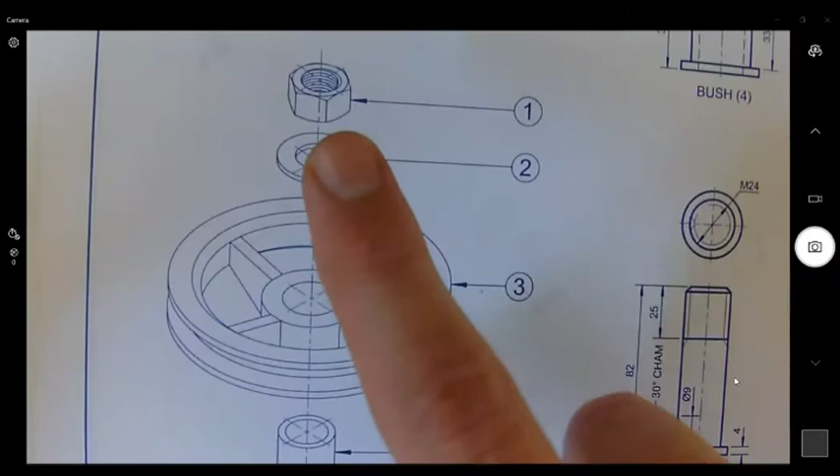Now, it's not really exploded, there's not a bomb on this page. What they mean is they gave you in 3D, that's what isometric means, how the machine, this pulley, fits into one another. As you can see, there's a shaft, then you fit this component over it, the bush over the shaft, the pulley, and then the washer and the nut that keeps it in place. And this makes up one entire machine or mechanical object.

Right, next, showing the relative positions. What they also give you is orthographic views of each of the parts. So they give it to you in 3D, but they also give it to you in 2D from different angles.

Now here's the question. This is the nut, but is this the front view or is this the side view? How do we know which view? So it's two views of the same component, but how do we know which one is which?

Go back to your exploded view. The question has to tell you which way is the front view. So according to this question, the front view faces that way. So that means...

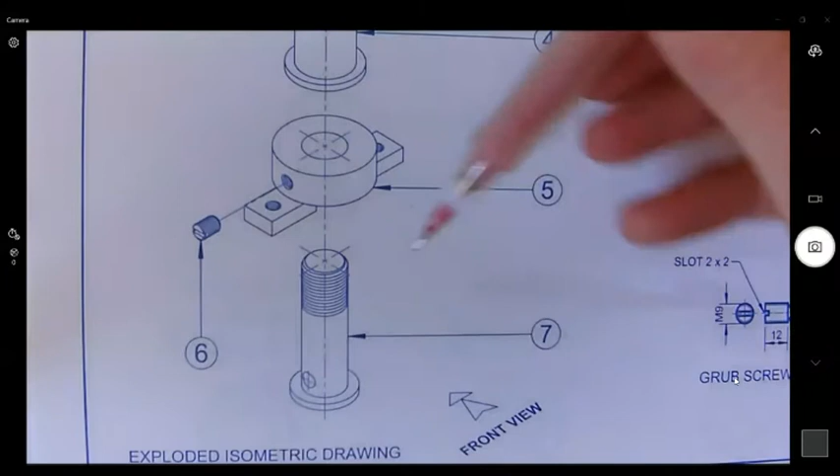I will get this, this is the front view. Then this side should be the left view. We can't see the right view because it's at the back, and you can't see the back view because it's also at the back. So the only two views they can actually ask us is front and left.

That's why, but usually they give you two views. So let's read what we have to do.

This is what they gave us. What do they want us to do? So answer the question on page 7. Draw to scale 2:1. Let's stop there.

Let's quickly just confirm again what 2:1 means. 2:1, I'm going to translate it, means 2 divided by 1, and 2 divided by 1 equals 2. So this means all the measurements must be multiplied by 2.

Okay, so draw to scale 2:1, in third angle orthographic projection. Mechanical will always be done in third angle, which just means if you draw a left view, it's on the left side of the front view. If you draw a top view, it has to be above the front view. Your front view is always your starting point, and we go from there.

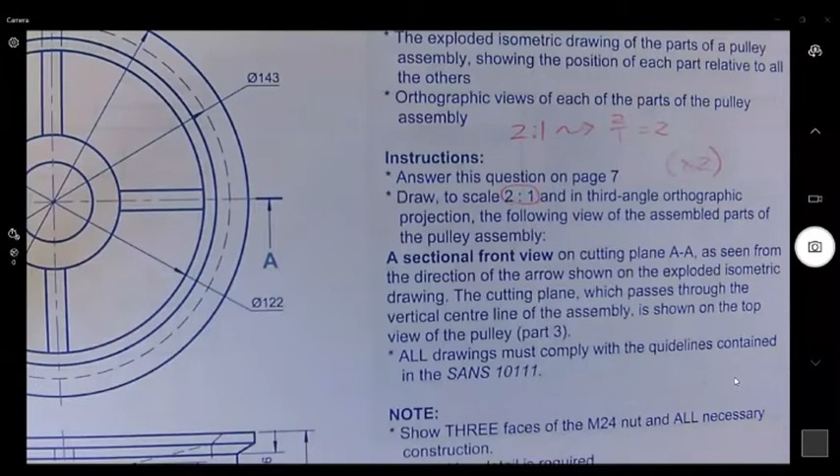Okay, so draw this pulley assembly, and the only view they want is one view, a sectional front view. Sectional means it's cut. Where is it cut? On cutting plane AA. Let's look for cutting plane AA.

It should be given to you somewhere on one of the components. Let's see. The top right, sir. Top right, yeah we go. Thank you. There. So according to this picture, this pulley is going to be cut in half, exactly halfway.

So it's almost like if this was a piece of cake, the front part will be removed. Okay, so they want a sectional front view, and that's the only view they want.

Sometimes usually they ask for two views. Today, just to start off, we're going to start off one view. Okay, as seen from the direction of the arrows, let's just go back.

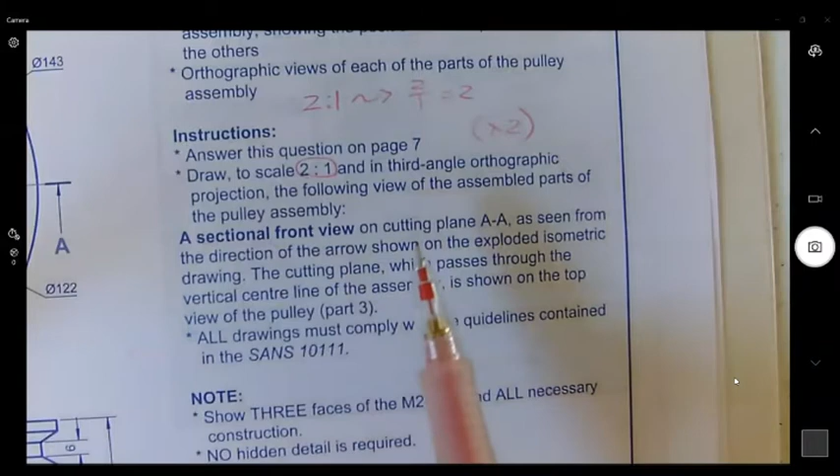Now, since the arrows are pointing upwards, it means this part in front is removed and the back part is left behind. If you look from a top view perspective, we're not going to draw it from a top view, but just so you get the idea, vertical lines. This is also important to note.

Show 3 faces of the M24 nut. We'll get back to this. And then luckily, no hidden detail.

All right. Now, a new thing that you also have to start doing for mechanical is you need to do some planning.

This planning will help you finish the picture quicker. The first thing is they want only one view, the front view. That means they gave us too much information, which they may do. We don't have to use all the information. We don't need to use the top views, but they are there because we need some of the measurements that might not be available to us on the front view.

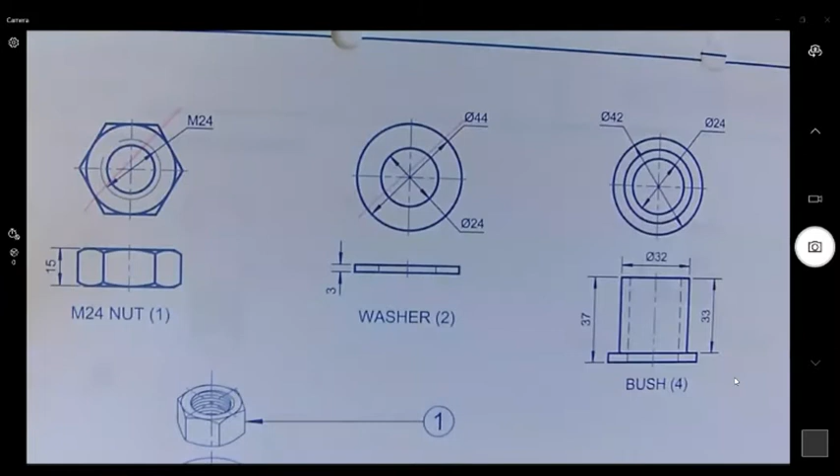What I usually do is take a color or pencil and lightly cross out the views that I don't have to draw, so that I don't get confused about which one I have to draw. This is part of my planning. It's not something you have to do, but I recommend it.

So for every single component, I'm crossing out the parts I don't have to draw. The grub screw, don't have to draw that part. Don't cross it out too much because we still need the measurements, but you don't need to draw it. This part we don't have to draw. We only need to draw the front view of the bracket. And I think that's it. That's the first thing that I do for planning.

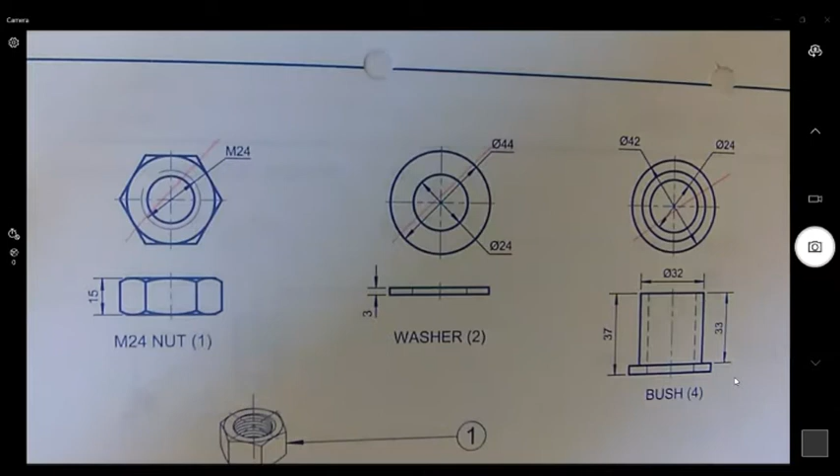The second thing for planning is to plan out how you're going to cut this picture. What we mean by cutting is that since we're going to section this view, we are going to see some of the components on the inside of the drawing. How we demonstrate that something has been sliced open in EGD is what we call hatching, which is lines drawn at an angle.

Let me just quickly get the memo so you can see what I mean. I'm going to get the memo of this drawing just to show you how the end result will look.

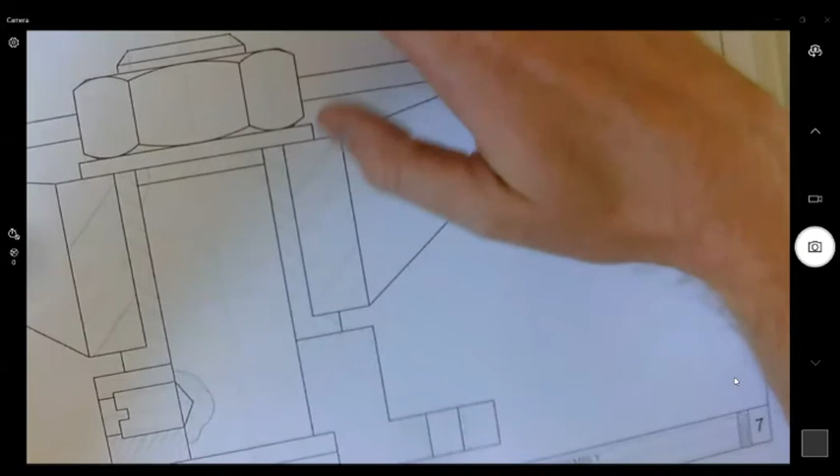This thing is cut in half, and those lines, all these skew diagonal lines, represent hatching, how the blade passed through this object. But you'll see some of these components are not hatched, and there's a reason for it. There's a rule: we do not usually hatch a shaft, the bolt, the nut, and any support structure, but we'll get back to this. So there's the final image.

So you know what we're drawing, what we're working towards. Do you see how big it is? If I zoom out, look how big it is on your A3 page, just because the scale is 2:1.

Now back to the drawing board. So the next step I always do is I first determine for myself which view belongs where. And then the next thing is, what do I need to cut and what don't I have to cut? So what doesn't need to be cut at all or hatched?

So for the nut, there's a rule: we don't cut the nut, so I'm going to encircle it. It's going to stay. So if you redraw it, even if there's a blade, if you pretend a blade passes through it, you leave it. Same thing for your washer. You don't cut it. This is very important, you'll see on the picture.

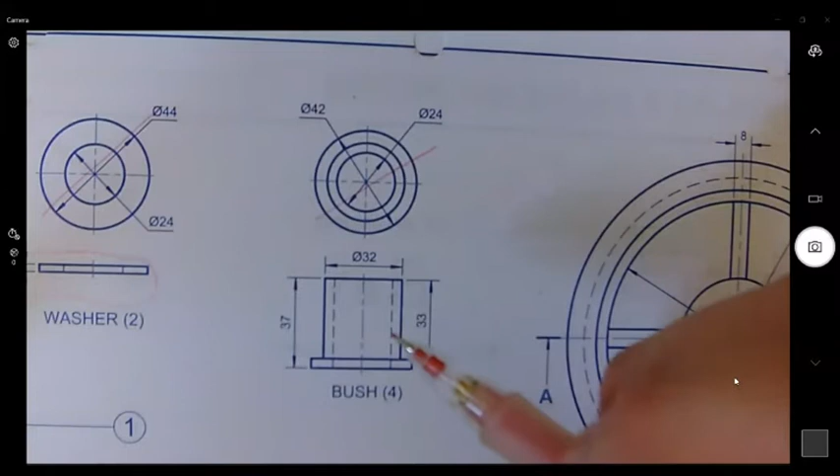But a bush needs to be cut. The general rule that I always remember in my head is, why are we cutting in the first place? Because we want to show someone what's going on inside the machine, that's the idea. But think about it, what's inside, let's say, the shaft? Just more metal, there's nothing more to show. So that's usually the rule I remember, with a few exceptions like bolts, washers, and support structures. That's always what I remember.

I think they're testing the security alarm.

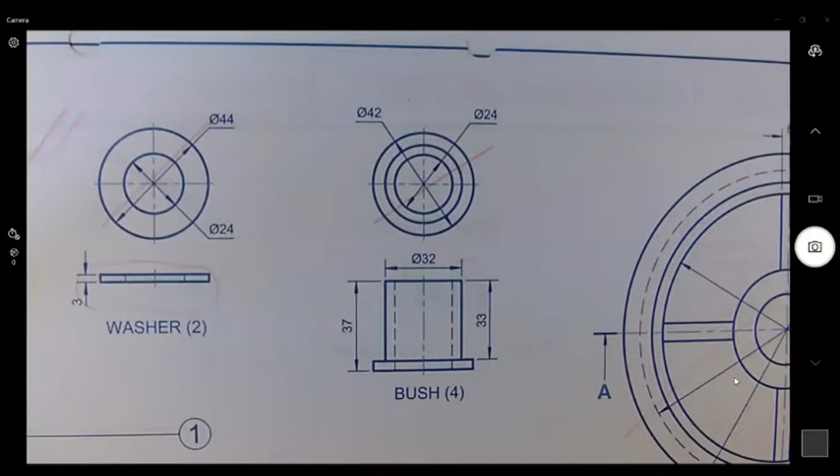So for the bush, your hidden detail acts as the guide of how to cut it. What I do is take a different color or pencil, and I just quickly draw in the hatching for myself. So this hidden detail becomes part of the drawing, and that part will be hatched. The other side will be hatched too.

And then these lines on the inside will fall away. We're only going to draw the outlines and the hatching itself. So that's another rule I remember.

If there's, for instance, that little line there, that part of the line won't be there anymore if you draw it, because we only draw the outlines. Inside this bush, the shaft will fit inside the bush, and the bush will fit inside the pulley, so it's almost like a puzzle piece that you fit together.

Okay, so there's my first component, and I've planned out my hatching, just quickly freehand, so I know what to do. So I'll recommend, this is a nice step to follow.

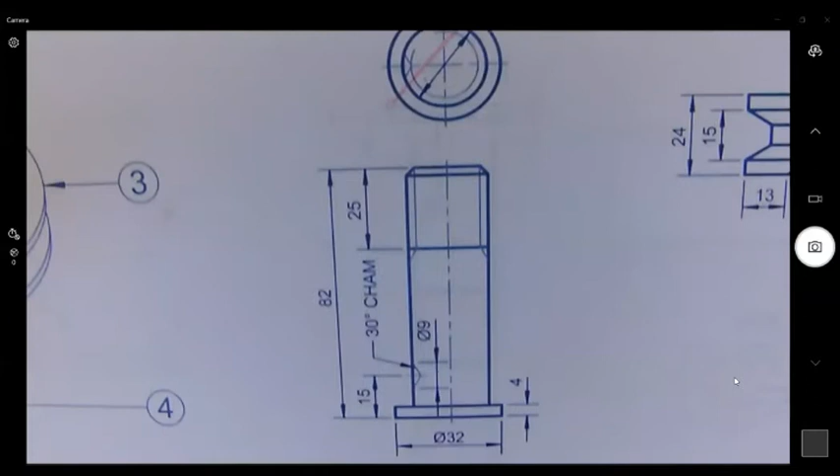Okay, next one, the shaft itself. Since there's nothing inside the shaft to reveal, it's just a metal piece, we're not going to hatch it, except for this little part here. Why? Because there's a small grub screw that holds the shaft in place so it doesn't rotate. They do this sometimes, otherwise this component, your bracket, is going to swivel around as well. So this is to keep these two components from turning.

So basically, the grub screw will fit in here, if I draw it quickly. So there it is. And then what you do is they call this partial sectioning. You take a freehand, and in that part there alone will be hatched. The rest is the same, just that little part will be added.

Okay, done. Are we going to hatch the grub screw? No, because what's inside a screw? Just more of the screw. There's nothing else to show, so we're not going to cut it.

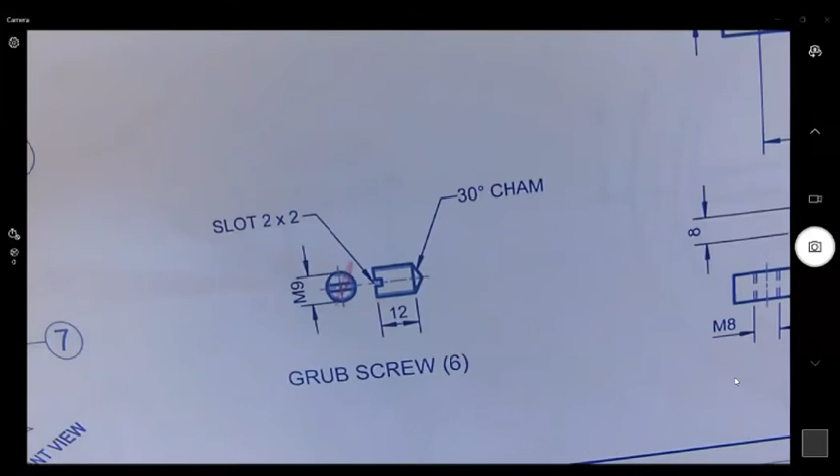Let's go to the bracket. The bracket actually makes it easy to see how we're going to cut it. There's a hole. Why do you see double lines? Because the outside two hidden detail lines represent the hole itself, and the lines on the inside represent the threading.

So there will be some kind of bolt that will screw into this component to hold it in place. But we only care about the outside. Oh no, we care about both. I'll show you what we're going to do.

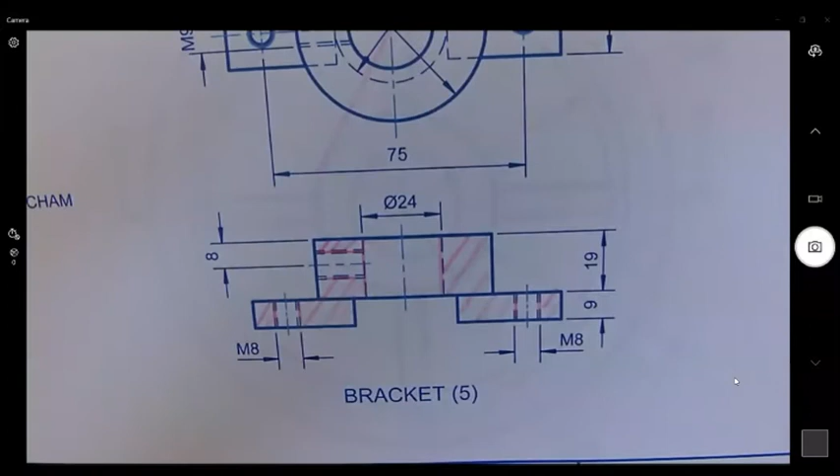Okay, there's a hole. This is where the grub screw will fit in. And then there's a big hole here where the shaft has to fit in. And when we add the hatching, there we go. Okay, one more component to plan, and this one is a bit difficult just because there are so many lines.

The pulley. Okay, bear with me. Remember, because we're going to cut this thing in half, a lot of these lines on the inside won't be there anymore. Okay, so I'm going to follow the hidden detail again as a guide.

Now I'm going to start hatching it. Remember, this is just our planning, we haven't even started. By the way, the rule for myself: as soon as hatching goes over lines in the middle, those lines won't be there anymore. Let me just show you on the memo again what I mean.

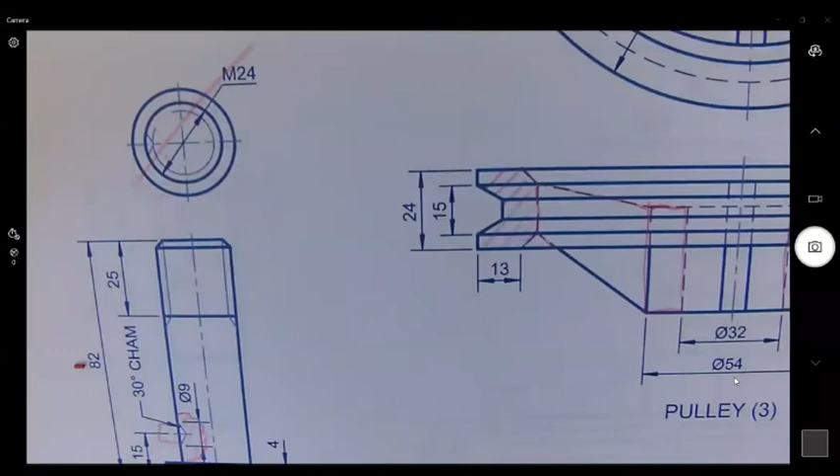Okay, do you see? There, that's that same part. You see, you only see the outline, not all those lines on the inside. Okay, so compare, look at all those lines. Now you only see the outline of the pulley, so it looks a bit simpler without all those lines.

Okay, right, we do not hatch this part. Yes, this part is cut as well, but if you look from a top view, it's a support structure. Let me go to the 3D picture. That wedge, the purpose of the wedge is to hold the outside pulley and the inside part of the pulley together. And if you cut the wedge in half, what will you see? Nothing, it's just more of the wedge.

But the rest of the pulley has to be cut in half so we, for instance, can see the shaft in the middle, because that's the idea. We'll see this as well. We're going to see this as well. We won't cut it because it's at the back of the pulley.

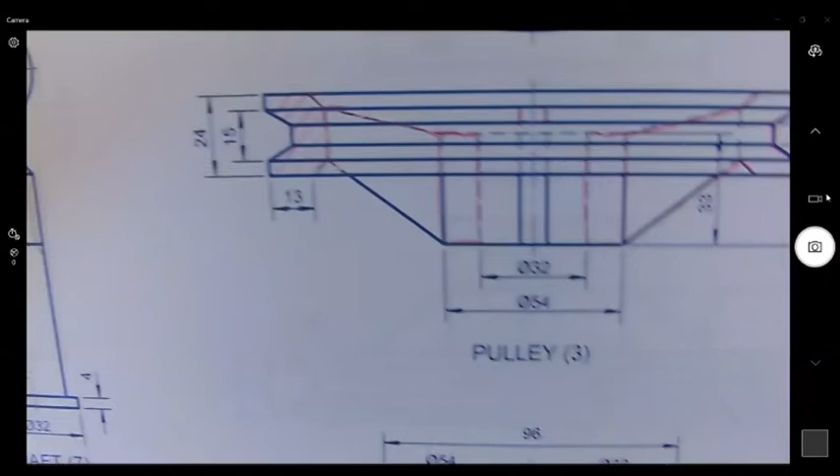Go back to the 3D picture. So if I cut it there in half, this is that part there. And then that groove there, that edge, is what we see there at the back. Okay, so this part will be hatched and all those lines fall away. This part will be hatched. This is cut but not hatched.

Here we go, this might feel overwhelming. That is why we're starting with this in the beginning of the year. You have enough time to practice this, so don't worry. This won't be something that you're going to write a test about tomorrow, or for the first month. So just start. Like I said, if you mess up this drawing, it's fine, it's about learning. And if you still struggle, then we'll organize some extra classes a bit later in the coming weeks. Okay, so there's my planning.

Now I'm actually ready to start.

This took a while because I had to explain, but this should take you not more than 5 minutes in a test. This is just to plan out your picture. But I guarantee if you plan your picture out before you start, especially how you're going to cut it, it will save you a lot of time and headaches later.

Okay, now let's go to our blank picture. You can choose which component you would like to start with. What I've learned over the years is it's easiest for me to start with the shaft itself because everything else fits onto it, so it's almost like the center of the entire shape. So I usually start with this guy, component 7. But you could have started with the pulley instead, that doesn't matter.

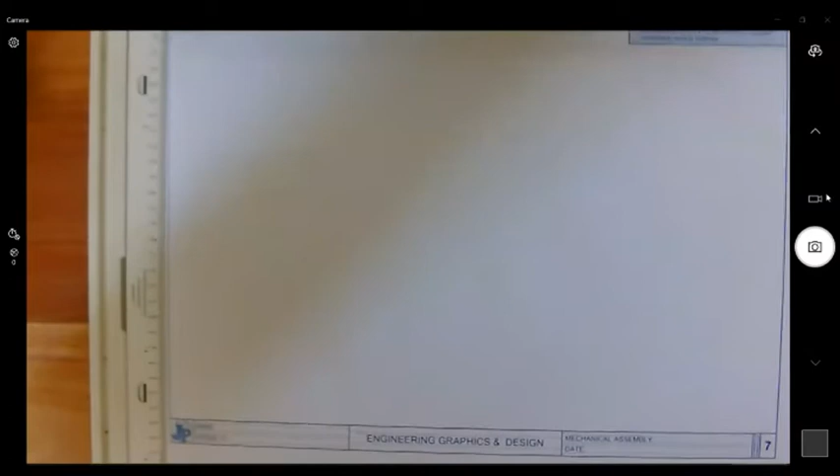Okay, here's our next problem. In front of you on page 7, we've got a blank page. Where do we start? So we start with the 60 and 30 degree lines. Yes, but the question is, where do we start? On the paper. Yep, but where on the paper?

So you have to draw those things so you know where to start. No, you're thinking about isometric. We're going to draw this flat. You'll see now what I mean. This is flat, two-dimensional.

Since we're only drawing the front view, we only have to draw one component. We're going to draw it in the middle, so there's enough space on this side and this side. A good way to check that your picture will fit is, since the shaft represents the highest point, you take that measurement, 82. Oh wait, I forgot something.

Guys, before we continue, the scale is 2:1. So quickly take your calculator and work out all the measurements. What I do is cross it out, and you double everything. Otherwise, after a while you'll forget about the scale, and then you'll get this weird big shape, small shape situation. So quickly, before we start, take your calculator and multiply all the measurements by 2.

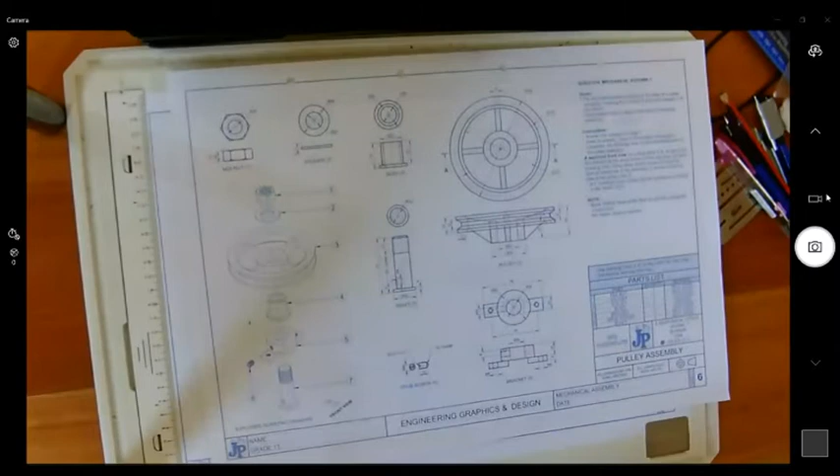Okay, so let's quickly do this. I'm going to do it as well, and then we will continue, so you can see what I'm doing. Let's quickly just double all the measurements.

So you see, I think there's a question here.

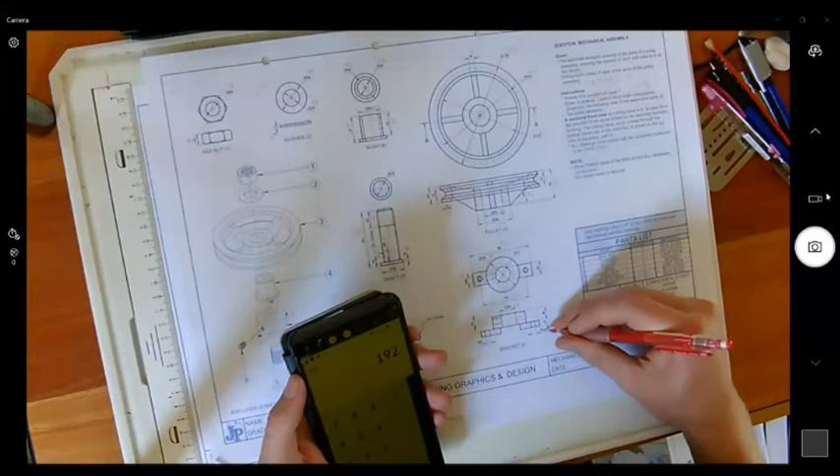Let me check if I missed anything. Now, this might feel like a lot of work, but there's nothing as horrible as drawing a picture with a scale, and then somewhere halfway along your drawing you forgot about the scale, and now you have this weird big, small part and nothing fits together anymore. It's horrible. So play it safe, add the measurements beforehand if there's a scale other than 1-to-1, to save yourself a lot of headaches later.

Just want to get this a bit closer.

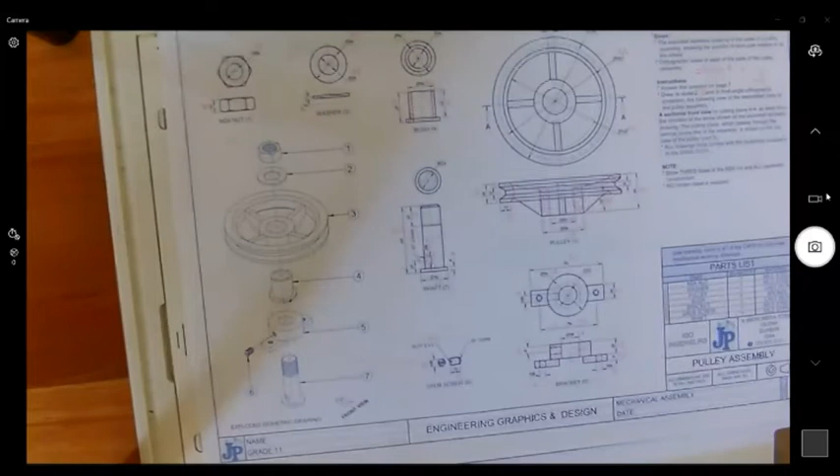Okay, I'm going to put my question paper just here at the top so I can still read it. Now we're going to start. Like I said, the middle is the best place to draw this picture. Let's say in the future we have two components to draw, a front view and a right view, then the front view would be here and the right view here. But since we only draw one component, planning for space is not that crucial. When we get to two pictures, we'll discuss that. So I'm going to start here in the middle somewhere, not exactly, just plus minus. But what I'm going to do is start closer to the bottom, drawing upwards, since the shaft, if you look at page 6, is the lowest point in that assembly line.

Okay, so I'm going to start.

You do this as the Afrikaans saying goes, I think it's an English saying too: to eat an elephant, you eat it piece by piece. You're not going to swallow the entire elephant at once. The same thing with mechanical assembly, one part at a time.

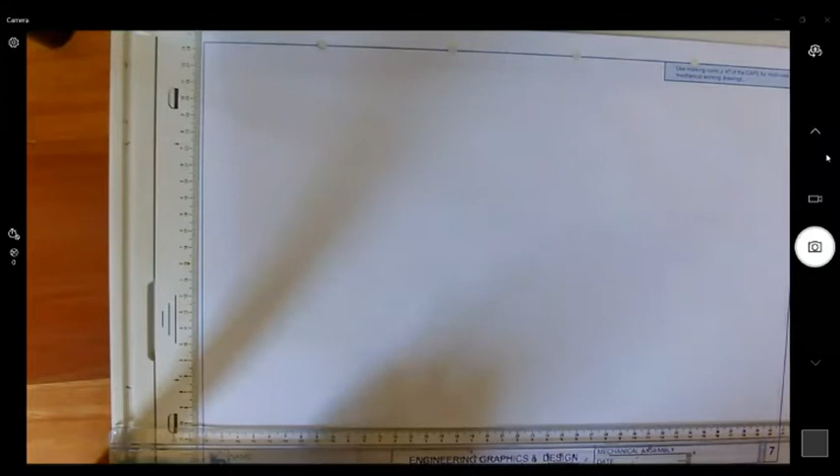So I'm going to start with drawing the shaft. I'm going to focus on this part. Use the measurements and draw that entire component. What you can do, however, is not make that part too dark yet, because we have to add the grub screw afterwards. The rest you can darken already and complete, drawing it exactly the same way. Just that part there I want to show you.

I'm going to zoom in closer because I'm only going to draw on a small part, and I'll move it around as I'm focusing on different parts of the drawing.

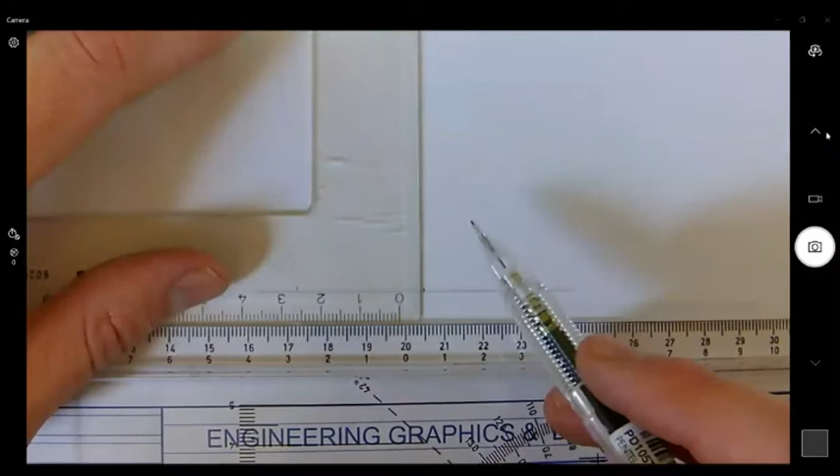Pro tip for you guys: since the shaft needs to have a center line, if you look at the picture, I'm going to draw the center line immediately, because I always forget to add the center line. I always forgot, and I always lost marks for center lines. The center line.

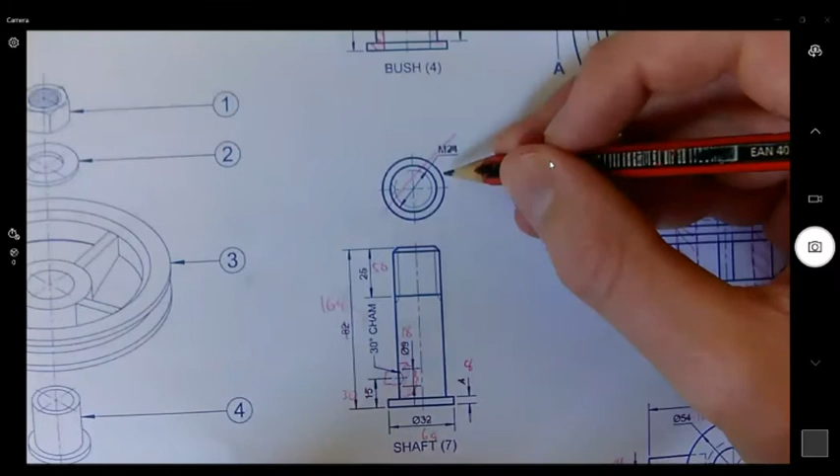I'm looking now for how big the shaft is, and where you'll get this answer is from its top view. So it's 24 - oh no, sorry, I'm lying, it's not 24. Where is the size of the shaft? Then it should be probably on the pulley. Oh, here it is - since the shaft has to fit inside the pulley - no, that's the bush. Let me say it again: since the shaft has to fit inside the bush, that is the size of what the shaft should be. So is it 40? Just want to check, is it 48? Yes, okay, so the diameter of the shaft is 48.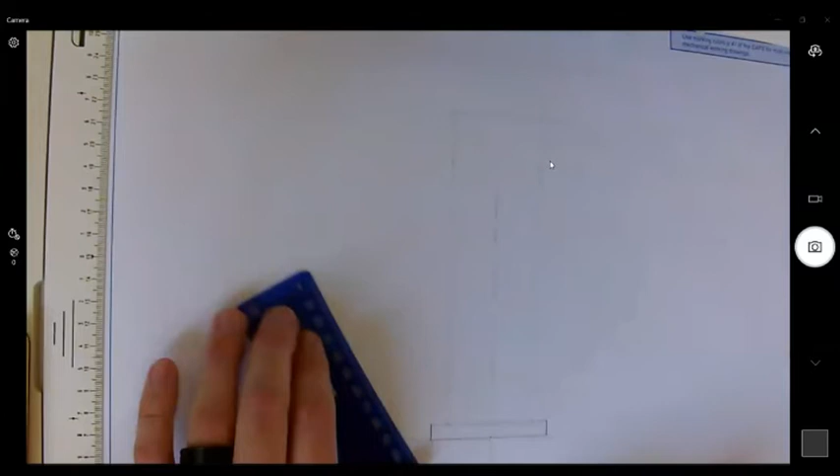Okay, it's almost time to take a break before the second period starts. Let's just quickly discuss the grub screw that has to fit into your shaft. I'm going to leave this at the top like this for now, and add all the detail at the end. So the grub screw has to fit in here. According to the measurements, it goes 30 millimeters up, and this is the center of your grub screw. So move this up a bit. Okay.

It's said here that the angle of the screw is 30 degrees, so that means if it's 30 degrees, but now it's at a 90 degree angle, you can use your 60 degree angle. But first, just draw the grub screw itself. So it's 18.

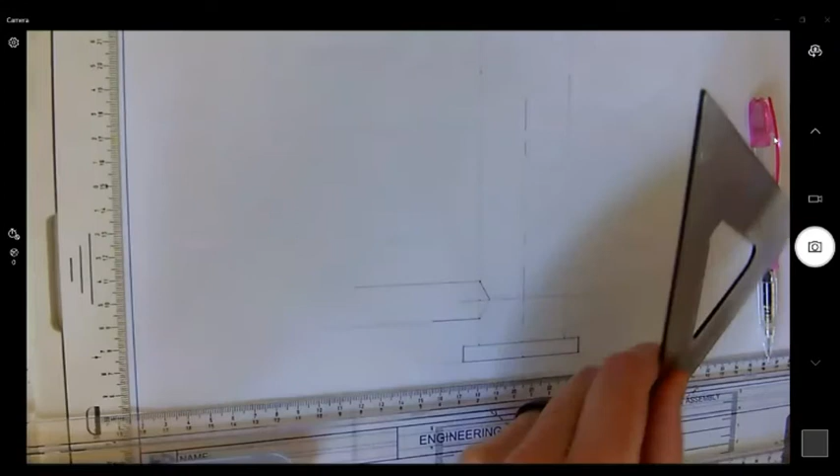Okay, so here's the grub screw. And now what you do to add the hatching is draw a freehand squiggle, just like this. This is fine. And then you take your ruler - I'm just going to turn it this way so I can fit in my ruler actually - and now you just add your hatching.

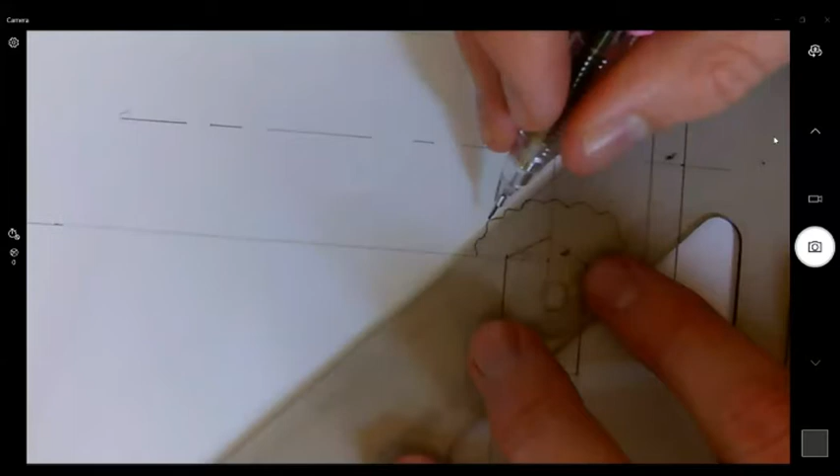Okay, so that's how far we are with the drawing, or that's where I am. If you're following along - oh, I forgot about the little part here at the top of the grub screw. We'll do it when we come back. Okay.

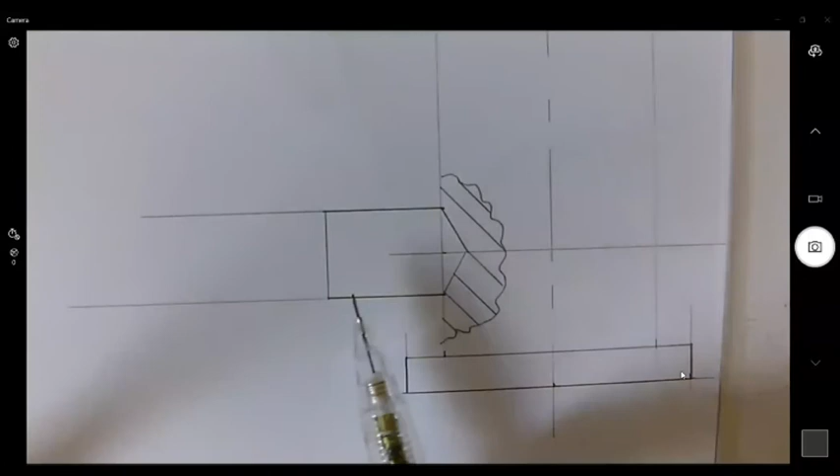Quickly record it, there we go. Okay, so how did I get the gap from there to there?

The complete distance, or the total distance, is 64. If you half it, it's 32 - that's the one part. And then this shaft here has a diameter of 48, because 24 times 2 is 48. So it's 32, half of 48 which is 24, and the difference between 32 and 24 will give you that distance there. All right, is that fine?

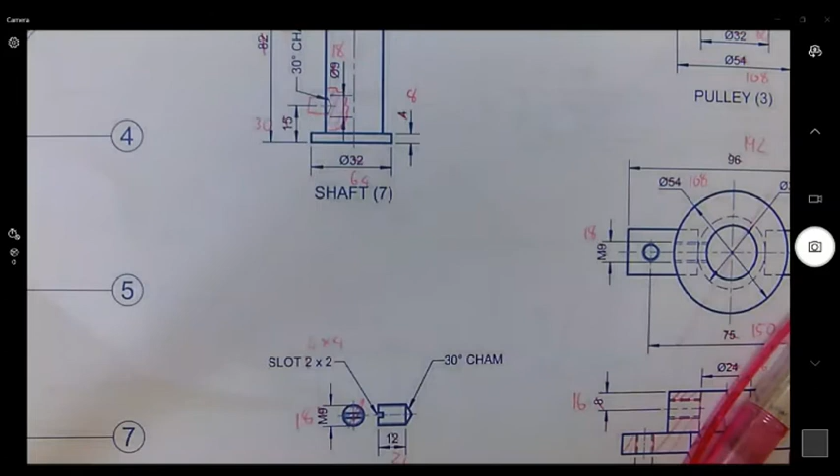Sir, how do you know how long... the thingy that we drew, the last thing we drew. How long do you know that's supposed to be? The grub screw, from there to there. Yes, sir.

There's the distance. So from... oh, okay, there you go. Thank you, sir. Don't worry, someone else might have missed that as well. Someone else who has a question?

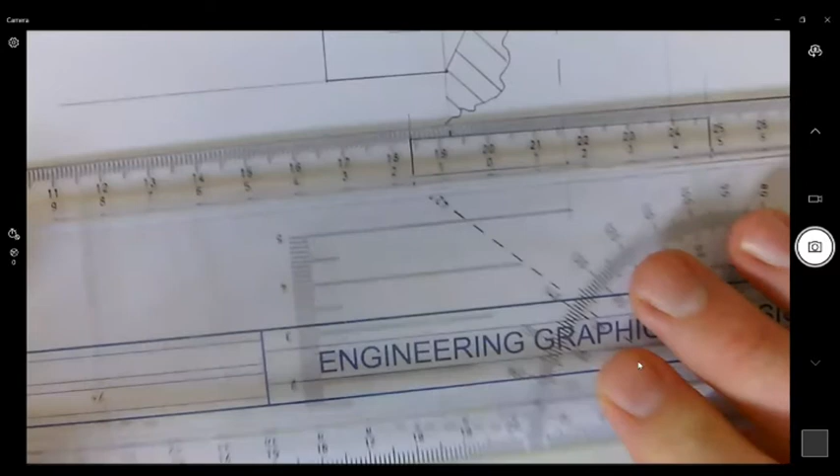Okay, let's continue. Before I leave the grub screw, because it's almost done, what I forgot to add is there's a little gap at the top where you can use a screwdriver to tighten the grub screw. And the grub screw is also a circular object if you look at it from a top view, so we have to add center lines again.

Okay, and then that little gap, it's 4x4. No, not the vehicle, as in 4 millimeters by 4 millimeters.

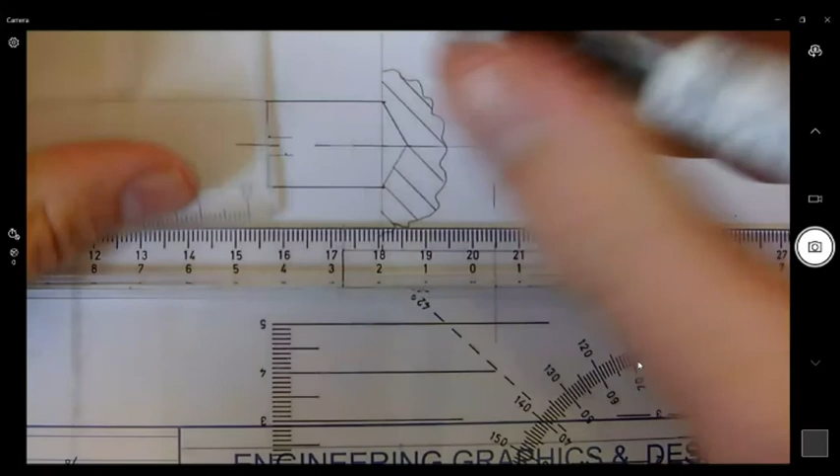Okay, there we go. But now I've got a problem. That line is there, but if I take my eraser it's going to rub out like half the page, or half the grub screw.

So what I recommend you should get for yourself is an eraser shield. Now what you do is line it up with one of the openings, that should work. That should be fine. No, maybe this one. Yeah, that should be fine. And I protect most of the drawing so I don't lose too much time trying to erase stuff and redrawing it.

If you're wondering why it looks a bit smudged, that's because I've got a dirty eraser. So make sure your eraser doesn't look like this, that's horrible. A clean eraser helps for a clean drawing.

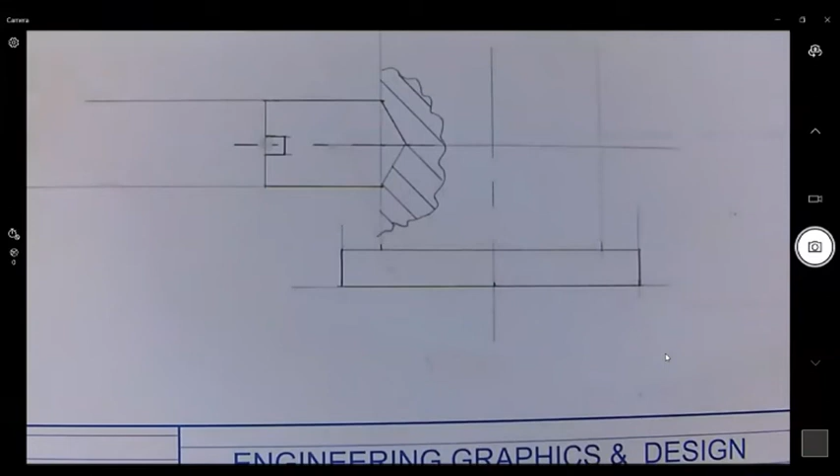Okay, that was the shaft. I'm going to leave this here because I also have to add the bolt, the nut, and the washer. So I'm not going to do too much for now, I'm just going to continue with the drawing.

Okay, the next part that has to be added is this bracket. So we've got this. I'm going to add the bracket now, it's this guy here. There. Okay, so now let's add the bracket.

Okay, what's the height of the bracket? Just want to quickly check something. 32. Do you see something?

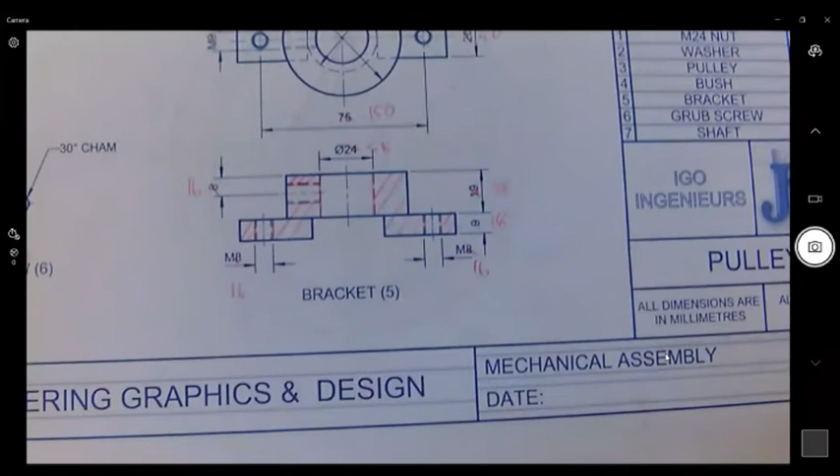If you look at the measurements, the gap between this and this is 32, and the spacing here is also 32. Well, that's before we worked out the scale, so it's 64. That means the shaft will fit in there nice and snug, so this bracket will stick over the shaft itself. So you'll see now what I mean.

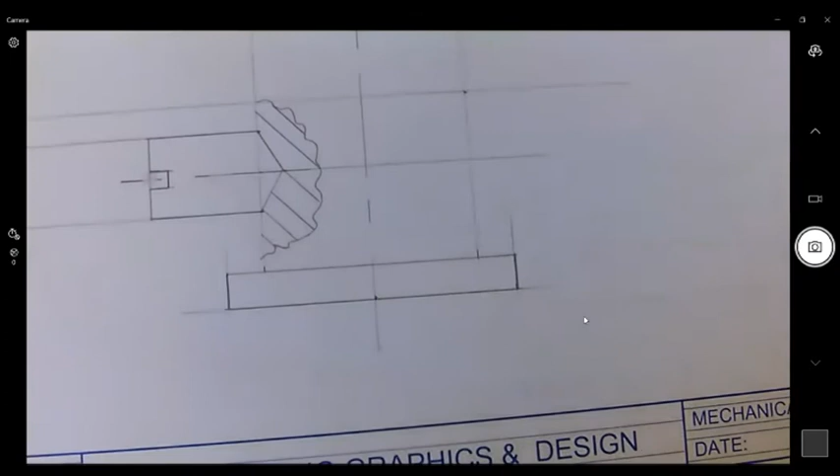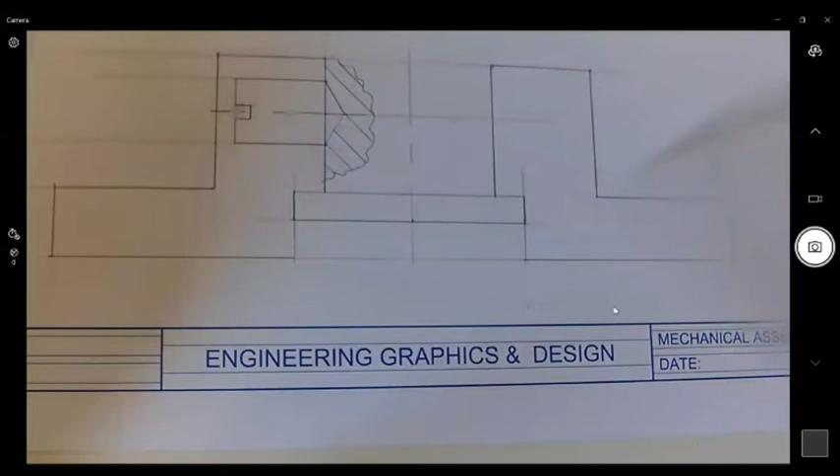Okay, there's the bracket. Now I'm just going to add the hatching. Now the rule about hatching is the angle and spacing don't matter, but it should look different. Every new component that's hatched should look different. And usually my rule is: the smaller the component, the closer the hatching together; the bigger, the wider the gap between the hatching.

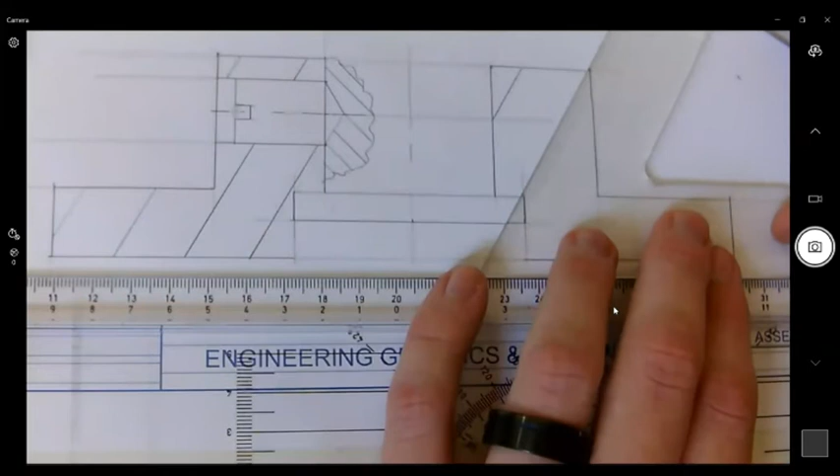Okay, there we go. So we've got the grub screw, we've got the bracket in place. I just think I need to darken this tiny bit more.

Okay, so I just want to check if I missed anything about... oh, I did. Guys, what did I miss? I forgot about the holes. Oops, okay, that's not too bad, it's likely just a bit of hatching I'll have to erase. I completely forgot about it.

Now there's something about the threading I want to show you when we get to these holes in the bracket, but we'll get there now. 16, so it's 8.

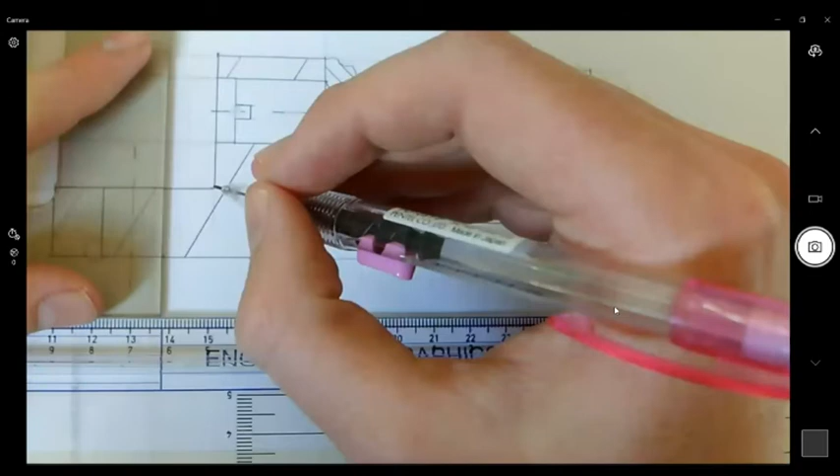Now I just need to erase that. Let's see if this side is a bit cleaner.

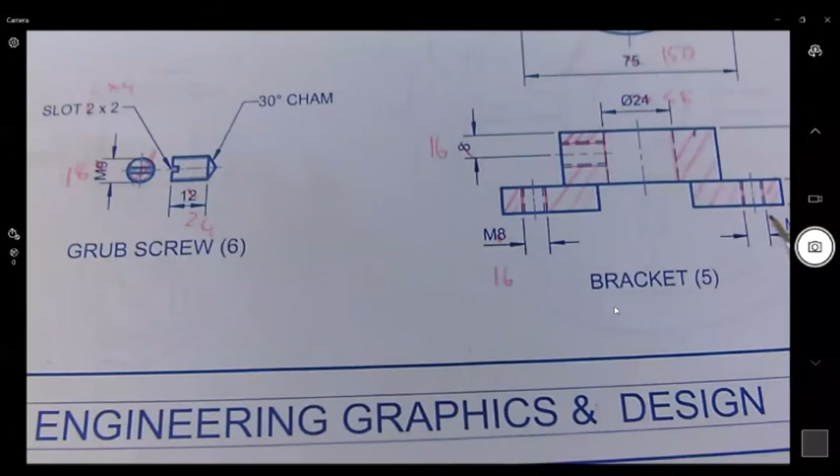Okay, now something about the threading we have to talk about. As you can see, there are 2 lines of hidden detail at the holes, because what they did is put in threading, which is almost like a groove for bolts to turn into, like our grub screw. Now, because the grub screw is already in there, we don't have to show it. But since these 2 holes are empty according to the drawing, we have to show that threading. So what I mean with this is...

At this hole here, we're going to add threading on the inside. And I just want to check what is the... yeah. Now, I'm going to teach you a bit of calculations.

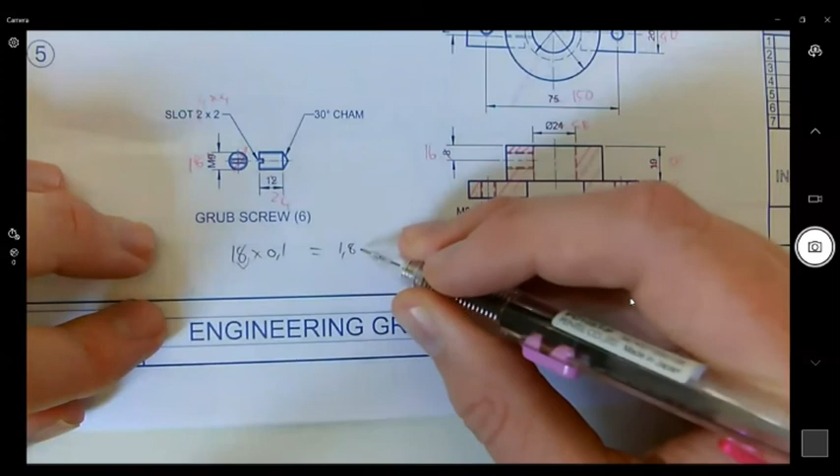So you get 1.8. Now, we can't work with 1.8 because to try and get 1.8 on your ruler is quite difficult, because there's 1, there's 2, so 1.8 is somewhere there. How on earth do you get it? You can't. So we round it up or down to the nearest whole value. So 1.8 is closer to 2. So we're going to work with 2.

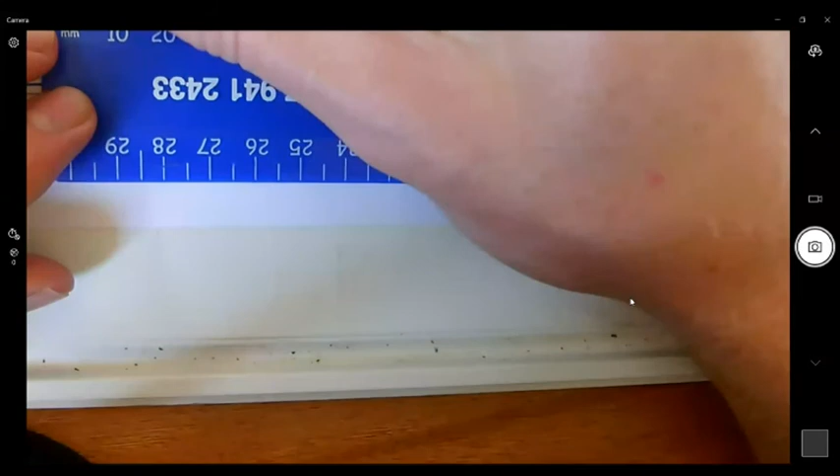So 2 millimeters. So what you're going to do here on your page, we're going to add 2 millimeters. We're going to add the threading. And then what you're going to do is add the threading. And then the only rule here is that the threading itself, the gaps between, is also hatched to represent that it's a hole. But because my hatching is so big, you won't be able to see it. So it's just going to look like 2 double lines.

And then that represents the groove on the inside to show it. I'm going to quickly go and get an example, a physical example from a class at the back, just to show you what I mean.

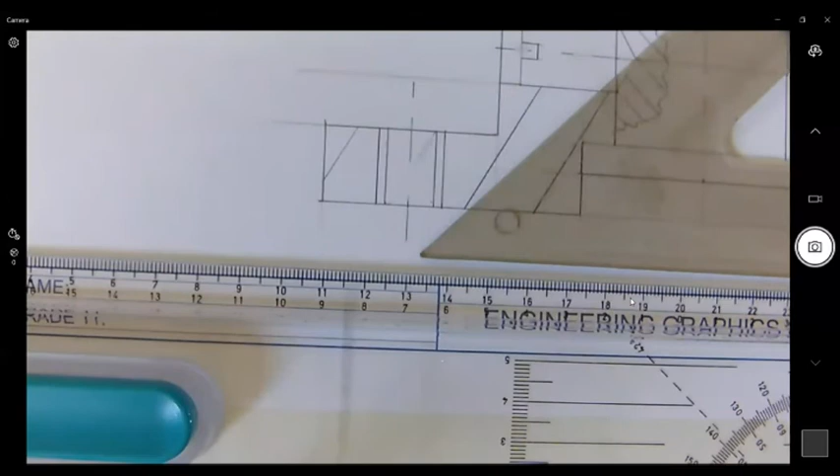Okay, so here I have a bolt, nut, and a washer, an example of them. Now, if you look at the bolt, there's threading on it. It's like a pathway or a groove so that the corresponding nut can actually rotate into it. So what I'm doing now represents what the grub screw is doing to the shaft. It has been turned into the groove, into the threading. But this hole here is almost like this nut here, an empty hole.

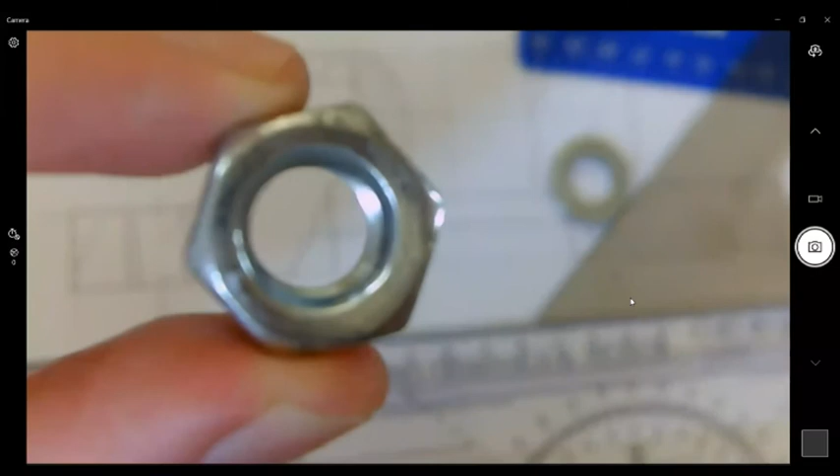But if you look carefully, just get closer. If you look inside the nut, there is threading where a bolt can slide into. Now, in this picture, we do not have additional bolts to draw, but we still have to include the threading to represent it. That is what that extra line represents.

And you work it out by always taking the M value and times it by 0.1, which basically means move the decimal to the left side. Now I just want to draw it on the other side as well.

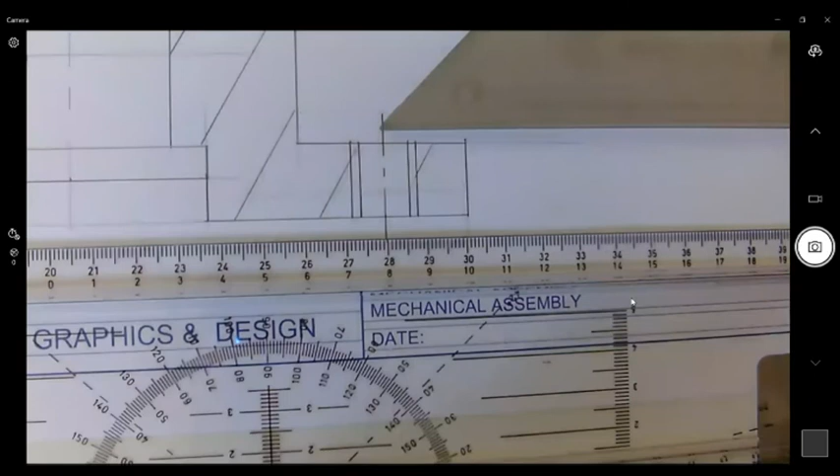So here's a good example. Since it's an empty space, I can actually add that bit of threading again. I'm hatching, so wrong one. There we go. So it will be here, but not in the space there. So this shows you that the threading, there's nothing inside this hole that has threading. It's empty. So then you just hatch over it.

Okay, we've got time just to include the bush. Let me just show you because then the time will be over. So check, bracket is done. Now for the bush. And then we're done for today.

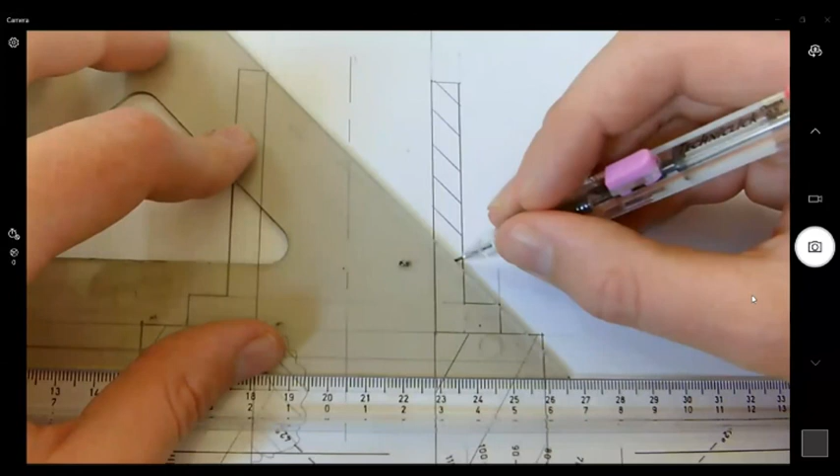Now I just want to hatch it and then we can call it a day.

So this is how far we got with our page 7 of mechanical assembly. We have done the shaft, or partial. We have finished the grub screw, the bracket, and the bush. Then tomorrow we have to add the pulley, the washer, and then I'll show you the construction of how to draw the nut. There's a certain recipe.

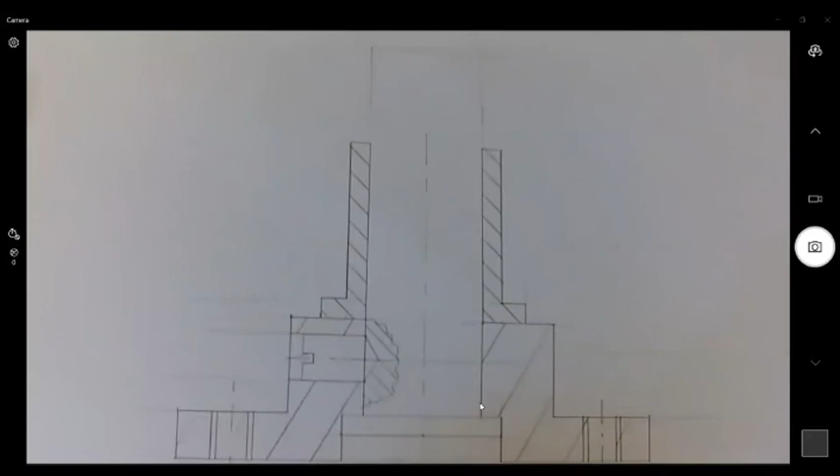Bye, sir. Bye, sir. Bye-bye. Bye-bye.